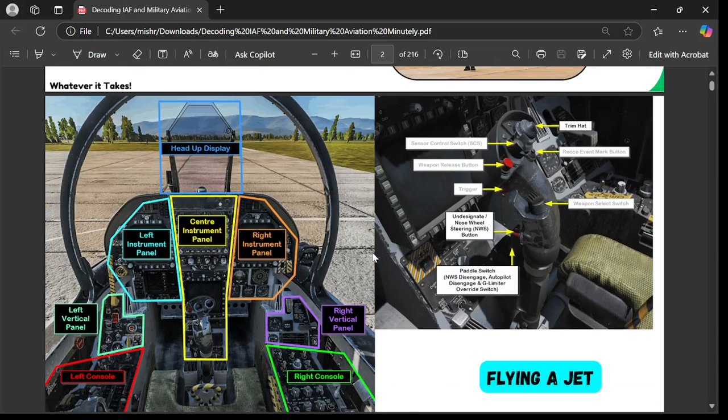So let me first take you through this tour of the slides which I have prepared, so that you get an overall idea of a lot of interesting things that we are going to discuss. Firstly, we'll be starting with the history, doctrine and roles of the IAF, terms in IAF. Let me first show you this particular slide where we'll be starting from the end, and then in a flashback format we'll go to the very start.

We'll start with, of course, flying a jet. I'll be taking you roughly through the procedure where you need to imagine that you are sitting in a fighter jet cockpit, right in front of you, and you can see these panels like right console, left console. You can see this joystick. Obviously I'll give you a rough idea how to use these control panels, how to basically start a fighter jet. Now you'll be surprised why I'm going to do all of this.

Obviously you have to first clear a written exam, then clear your interview, and then the medicals, and after that you get to fly a fighter jet. But I am starting it from backwards, right? Actually the point where you need to go. So just to give you a rough idea how it feels like starting a fighter jet, how it works, what are the buttons, what kind of demands and challenges are faced by a fighter pilot — not just in the way reels and short videos glamorize life in the Indian Air Force, and for that matter any other air force — but to actually understand the physical and mental caliber required to become a fighter pilot.

All right, all set, let us now start. See the control that you can see at the very starting is called a joystick, wherever my cursor is. For fighter jets, it's called HOTAS. We'll get back to that, but it's called HOTAS. This particular device that you can see right here.

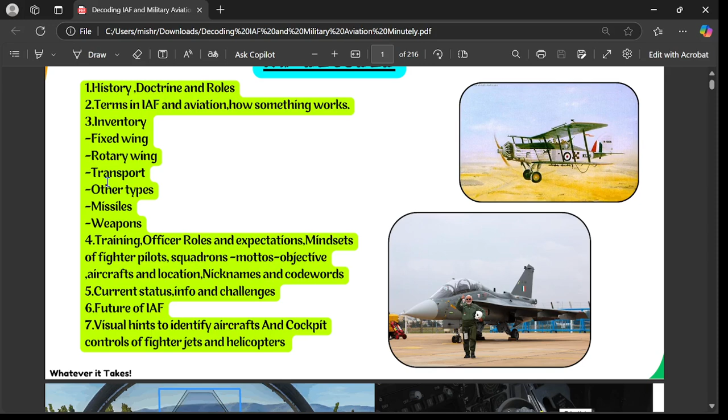And then the transport, then other types, missiles, weapons, training, officers' roles, current status, future of IAF, and visual hints to identify aircraft. The ranks in the Indian Air Force, just a glimpse. The commands and everything, the nicknames of the various squadrons, and the most awaited part, the various fighter jets.

If I just take a glimpse, just take you through this, the training procedures, and all of these things. And last but not the least is about the IAF's test pilot school. All right, so I hope you get an overview.

Let us start with the first thing first, which is how to fly a fighter jet, and then with the other things. Now let us start.

And this is all about listening. Imagine yourself as a pilot and you are sitting in this particular cockpit that you can see right in front of you. Are you there with me? Now, once you sit at this particular seat, these are the devices.

Get comfortable in that seat, wherever you are sitting, at a chair. Right in front of you is this joystick, and it's called HOTAS. Okay, let me write it.

HOTAS, which stands for hands-on throttle and stick, is the name for this complete setup. It has buttons to fire missiles and weapons, so you can fire right there in front of you.

Apart from this, this particular joystick can help you roll the aircraft. Listen carefully, you can roll the aircraft using this joystick. You can also change the pitch of the aircraft.

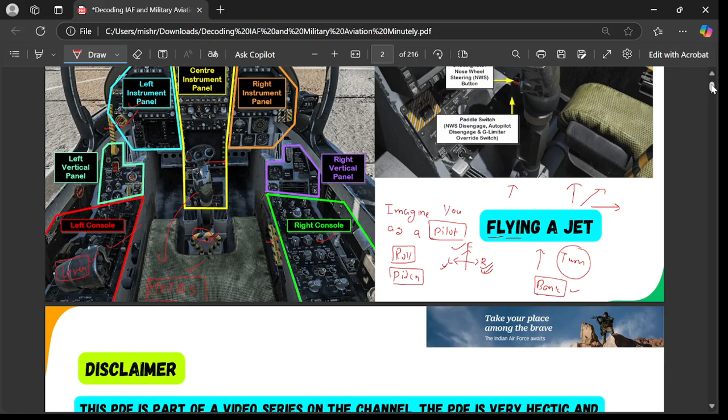We are not going to confuse you in that. Now let us focus on this hands-on throttle and stick, right? So the stick which you can see, if I focus on this, it has these buttons, let me show it to you.

Starting with this switch at the top, that is the sensor control switch. It basically controls all the sensors that are available, sensors detecting various things like the temperature in the cockpit and other parameters, the height, the humidity, all of these things.

Trim hat, this is one particular thing. The recce event mark button - recce means reconnaissance, right? Reconnaissance means when you go over an area and you survey the area for the purpose of some military intelligence gathering. So that is the recce event - you mark the event and the aircraft will note how much time it was doing the recce, taking the photographs. This red button is the weapon release button.

This is for the trigger. You also have some bullets, some bullet shots, to damage the other aircraft in close combat. For far away combats, you'll require to lock a missile, a beyond visual range missile or anything like that. But in a close combat, when your enemy is nearby, you'll be required to use a trigger. You can keep it pressed and it will fire ammunitions as per the given rate.

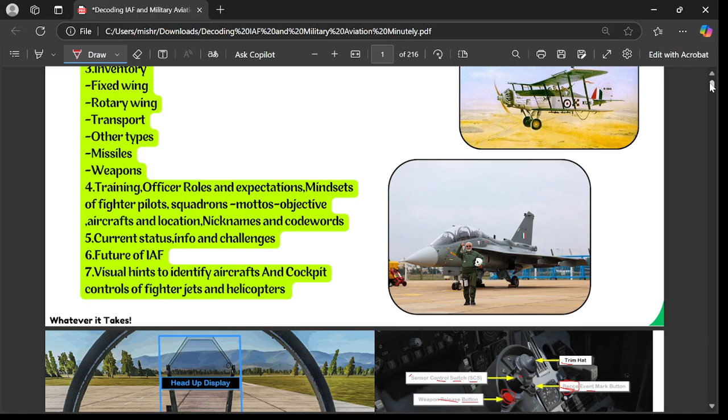So these are some buttons, just take an overall idea. During your training you'll have a detailed idea about how these things work, and at this stage you don't need that much detail, just an overall idea.

Now let us start with the left instrument panel. You already know the left instrument panel is at the upper side left corner, and at the downside is the left vertical panel. Remember that.

The whole instrument panel is subdivided into three parts: the left instrument panel, the center instrument panel, and the right instrument panel, right in front of your eyes. Below that is the vertical panel left and vertical panel right. Below that is the left console and right console. So: left vertical panel, right vertical panel, then left console, right console, and the head up display.

What is a HUD? This is the head up display, the display you saw right in front of you. Now this connects with an HMD. What is this HMD? HMD is a very special kind of helmet that pilots get, the helmet mounted display.

Imagine there is a screen right in front of you - let's say this is your heads up display. What is the role of this heads up display? It shows you a lot of information about the aircraft, like the altitude, the radar, the enemy locations, everything on this head up display. But this is fixed.

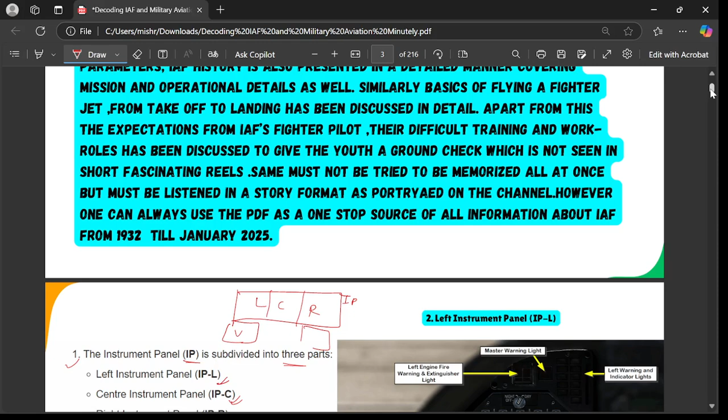Fighter jets fly with enormous speed, so time is a very important parameter here. HOTAS stands for hands on throttle and stick. The control stick is called HOTAS J and the throttle is called HOTAS T.

The stick is used to fly the plane. It is used to roll, to pitch the nose up, do maneuvers, and control the aircraft. But I didn't tell you about the turn yet.

Let me tell you about turning the aircraft. Turn is done by the rudder. What is a rudder? There are two pedals, similar to a bicycle, called rudder pedals. There is a left rudder pedal and a right rudder pedal. If you put the left rudder pedal, the aircraft will turn left. If the aircraft was going straight and you put the right rudder pedal, it will turn right. So this is the role of the control stick along with the weapons.

And what is HOTAS T? T is the throttle. It starts the engine and increases engine power, and it's also used to increase the speed of the aircraft. For example, if you inject more fuel using the throttle, more combustion will happen, producing more thrust. More fuel exits the back of the fighter jet's engine, pushing the air faster and with more force, giving more forward thrust and velocity. So the throttle basically controls your speed.

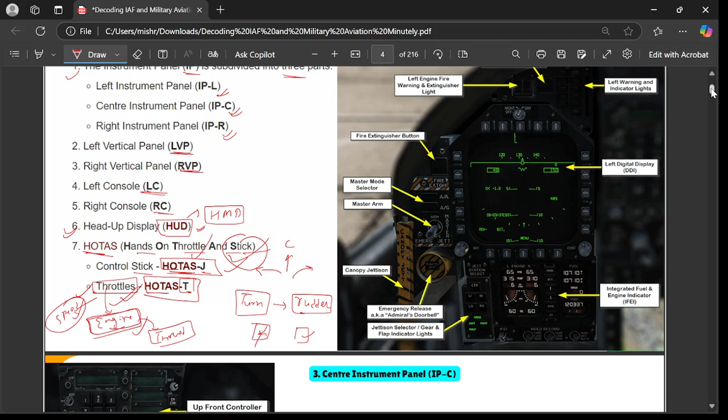Now let me take you through this instrument panel, your left instrument panel. Towards the upper left side, it contains some switches. Let's quickly dive through them.

First, at this stage is the master warning light. Close to that is the left engine fire warning and extinguisher light—if your left engine catches fire, this lights up. Then this is the fire extinguisher button. This is the master mode selector, and this is the master arm switch. Then there are left warning and indicator lights, and the left digital display—if there's any damage to the left side of the aircraft, it will be detected and shown here.

Moving downward, this is the canopy jettison. I already told you that whatever is painted yellow and black, do not touch it. If you press this canopy jettison button, the upper side of the canopy will blast away. It's used in emergencies, like when you're locked in and the canopy won't open due to fire. This is push to jettison—emergency release, also known as the Admiral's doorbell.

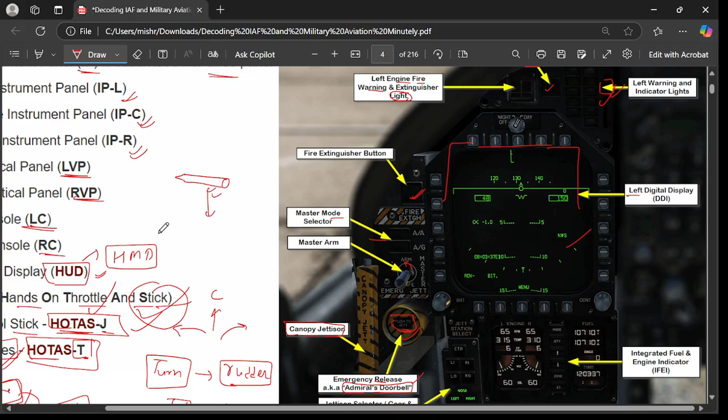If you push this jettison button, whatever extra fuel tank you're carrying gets released. Fighter jets carry fuel tanks that might look like a missile under the aircraft, but that's actually a fuel tank. This tank limits your ability because it's heavy with fuel—it's costly, though not as costly as missiles. So you can drop these fuel tanks to increase speed and gain agility during close combat. This jettison button is used for that, and it's called the Admiral's doorbell.

Next are the jettison selector, gear, and flap indicator lights, showing whatever gear you're in and your flap status. We'll discuss flaps later—they're part of the aircraft's wings, and when we talk about how a fighter jet flies, it'll be interesting to see the role flaps play in providing lift and making the aircraft fly. I was very curious to know how such a heavy machine can actually fly.

Elephants don't fly. Any heavy object doesn't fly, but fighter jets do fly. Being that heavy, how can they do so?

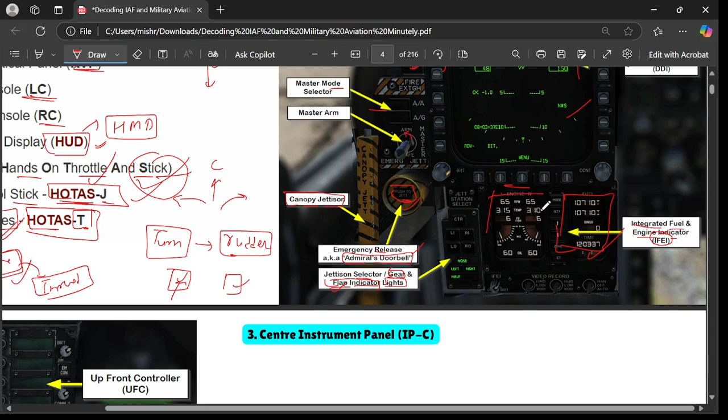Integrated fuel and engine indicator. These give you information about the engine, the fuel, similar to how it happens in your bike also, about how the engine is working, how many revolutions there are, rotations per minute, and what is the temperature of the engine. All this information is shown.

Let us move to the center instrument panel. Do you remember its location? You are in a fighter jet, you should remember, right? Right in front of your eyes, towards the left was the left instrument panel. At the upper side, in the center, is the center instrument panel.

It consists of the up front controller, or UFC. It has some radios, basically used to communicate with the air traffic control. You not only need to fly, but also need to be in constant communication. There are various radio and radar channels through which you can communicate with the air traffic controller, constantly sending your output, asking where to land, when to take off, all these things.

Heads up display and AOA indicator controls. These are the controls. You can see the BRT, brightness. There are some brightness adjusters and contrast adjusters, buttons to adjust the brightness of the heads up display. That is why there are a lot of buttons.

You can see the advanced multi-purpose color display here. This basically gives you information about the radar and map information. You can clearly see there is map information, giving you information about your targets and where to go. That is the advanced multi-purpose color display.

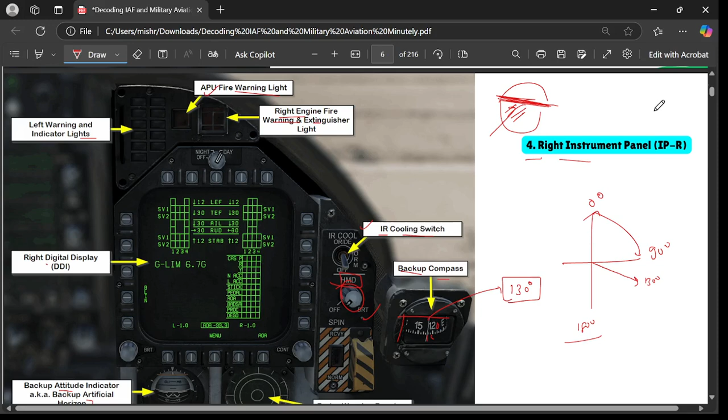Horizon means where the sky meets the earth. So this is the sky, this is the earth. You will be seeing a scene of the sky meeting the earth right in front of you, the horizon. With respect to that horizon, whether you are leveled, tilted left, tilted right, going down, or going up, all this information is shown, and it's important to know. So these are the pieces of the puzzle, these various instruments, minute instruments working together to make the overall picture a beautiful and good one, so that you can fly this beast machine.

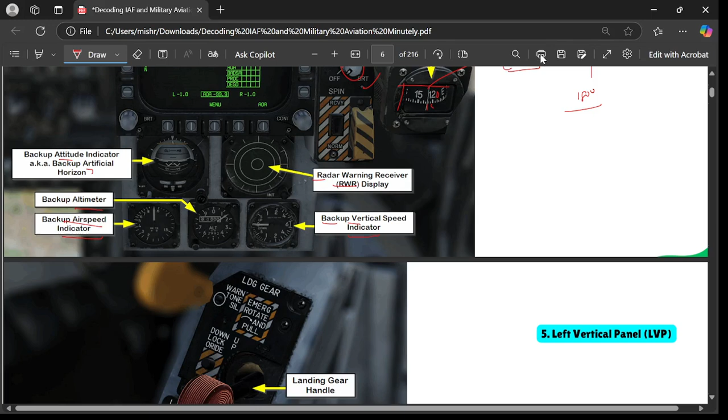Radar warning receiver display, backup vertical speed indicator, backup altimeter, backup airspeed indicator - all these are backups, in case your primary flight instruments fail to work because of some unforeseen reasons.

Now let us come to the left vertical panel. Where will you find it? Imagine the upper left corner was the left instrument panel. Close to below that is the left vertical panel. So you'll get these features.

Landing gear handle - so what is the landing gear? You have seen in the aircraft these wheels at the front side of the aircraft which are used during landing. So this is the landing gear handle.

This is the flap switch. If you put it to full, flap will be full. If you set it to half, it will be half. You can put it to auto also.

The selective jettison rotary switch button. This is the emergency switch - do not push this unless you are in emergency. Launch bar switch.

Landing taxi light switch - if you turn on this switch, they will turn on lights telling that you are about to land. Tail hook bypass switch.

Tail hook bypass switch means if you bypass this, the tail hook will bypass. There are some aircraft which require a tail hook method to land - they are basically landed by using a tail hook, a fly by wire system, as we say. So these fighters just fly by wire. Since the landing speed is so enormous, or the runway length is very less, then in that case we can use this tail hook method to stop the aircraft in time.

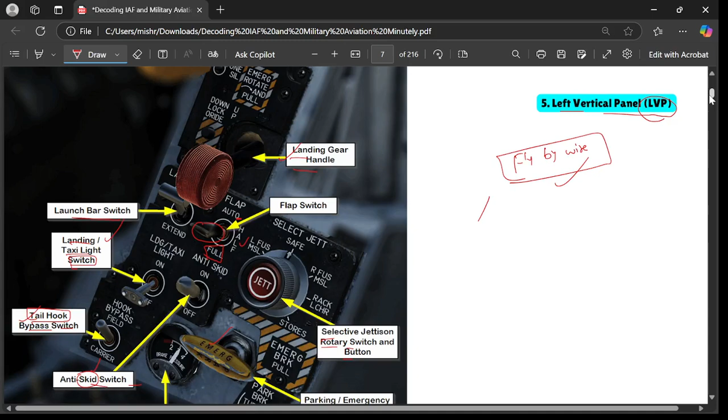And then there is a normal turn, which we will be seeing when we focus on the turn coordinator as a device. I hope you are aware of this. Don't worry, we'll be discussing about the flaps and all.

Now let us come down to the right vertical panel. You will see tail hook indicator light, tail hook lever - this is the tail hook lever. If you pull that lever, the tail hook will come out.

Wheels, flaps, hook, anti-skid harness, dispenser, wing folding lever - all of these are the levers. You can just pull it up or move it in a particular direction; a lever is just to move in a particular direction. Radar, altimeter - all of these things.

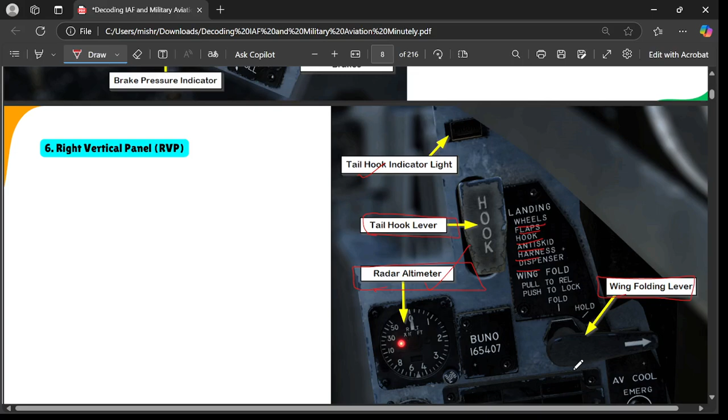Then hydraulic pressure, then right warning, flight control system, avionics cooling switch - so all this you will find at the right vertical panel.

Okay, now let us move to the left console. You are already aware of the position, right? Left console - so in the left console, you will get OBOGS.

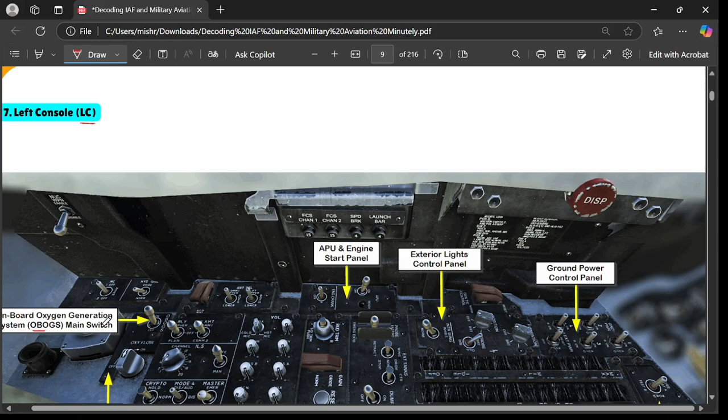Onboard oxygen generation system main switch. So this is the onboard oxygen generation system main switch, and then you can see a lot of switches - mode, master, APU and engine start panel.

APU is basically auxiliary power unit. In case your main power is gone, then your auxiliary power unit and engine will support for some time, and start panel - so this is the engine start panel right here. You'll press some switches here and there.

See, basically in a car, you don't just simply go and start the car. When you sit in a car, you actually put in the keys - when you turn it on, you put a particular switch, then the car turns on. Similarly in a bike, when you put in the keys, you press some buttons, adjust some buttons. So these are the buttons which make the engine ready. An engine is not like a bicycle - a fighter jet is not a bicycle, it needs to be slowly done.

This has been done step by step to protect the engine and do things in a gradual manner. This is for engine crank, the auxiliary power unit, you have to turn it on. After that comes the role of the throttle. You pull the throttle, and once you go to the throttle, the engine starts rotating, the blade starts rotating, it starts taking air through the intakes, and the fuel gets in. Then the blast happens, the engine starts, and you can move on.

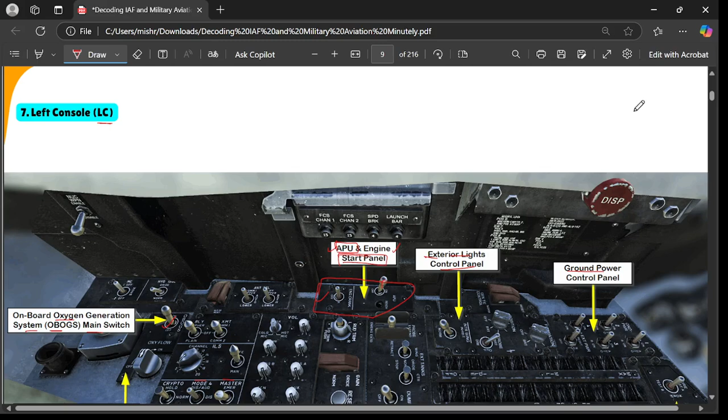Exterior lights and control panel, ground power control panel, right? Apart from this, this is the OBOGS dial. Now this is the volume control panel. This is the flight control system control panel. And then there are a lot of switches that you can see. Literally, when you go through your flight training with the Indian Air Force flying branch or anywhere, private or commercial flight training, you will be made to remember all these switches and their roles.

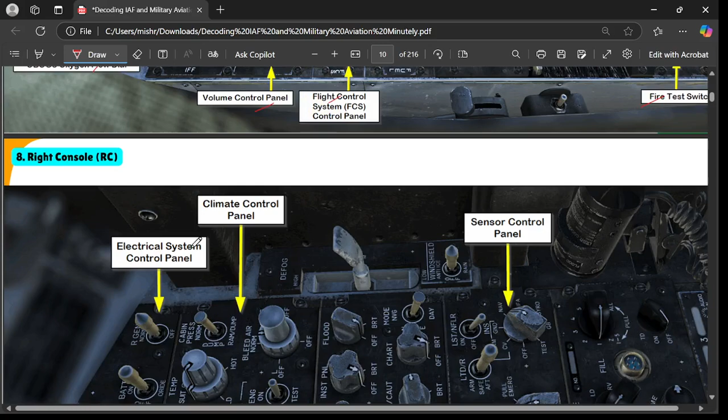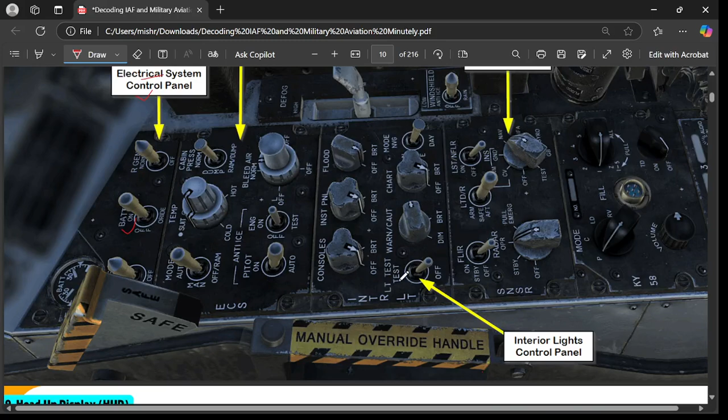Now the right console is the electrical system control panel. You can see the climate control panel. The electrical control system covers the battery, the lights, and the climate control panel. The sensor control panel lets you customize whatever sensors you want. These are the sensors. Manual override handle and interior lights control panel are also in the right console.

Now let us come to the head-up display. In the head-up display, all this information is shown. The same HMD is also available with your visor, your helmet mounted display. The helmet is a very cool helmet, I think one of the most cool helmets to wear.

First at the top, you will see a direction indicator or heading bug, which basically shows you the heading. In this display, every two entries is a gap of 10 degrees - 330, 340 - and this arrow shows your current heading, just before 335, so around 334 degrees. If you look at the direction coordinates, this is north, this is east, this is south, and this is west - so 90, 180, 270. 330 will be close to this direction, so you are heading northwest.

Now come down, and you'll get a vertical speed in feet per minute. What is this vertical speed? Imagine yourself in the aircraft - either it is climbing up or descending down. How will it climb up? You pull the throttle joystick a little backwards, so the aircraft climbs upwards, at some rate in feet per minute. This vertical speed indicator is showing 3960 feet per minute.

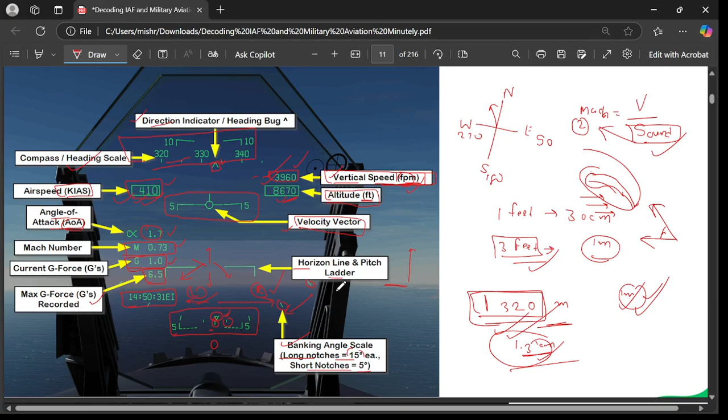Compass and heading scale, you already know. These are the information that you get through this banking angle scale - long notches, short notches. This is about the long notches you can see here, this is 15 degrees, and anything short is this much. If it goes towards a particular direction - it is in the center right here at this location, which is 0. So if it is going in this direction, it means right banking; if it is going in this direction, it means left banking. So it is not a tough job, right? You'll get acquainted with it very soon once you are doing the practice.

Now come to the control sticks. This is something you will be having your hands on throughout your entire span of flying the fighter jet. So, hands-on throttle and stick, you can say, a lot of switches. This is the thing fighter pilots do enjoy during a combat situation. Everybody who wants to become a fighter pilot dreams of a combat situation, real-life combat situation, or at least a dogfight simulation type of fight with our own friends.

Okay, so this is the instrument that you need to be focusing on. This is used to lock missiles on the other aircraft. This is used to trigger guns, to move the aircraft right, left, up, down. This is basically the most important part. So your hand-eye coordination will need to be very fast to use this particular thing, and there are a lot of things - your hand-eye coordination should be very fast, right?

Now, at this point, I want to ask you - what kind of activities, games, and other outdoor activities can you do to develop very fast hand-eye coordination?

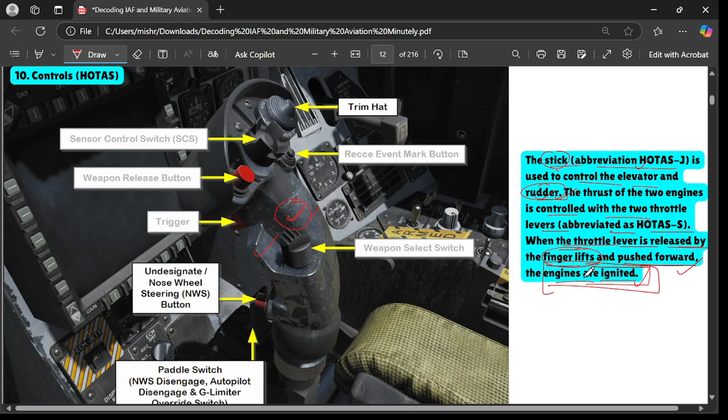When the throttle lever is released by the finger lifts and pushed forward, the engines are ignited. There's a finger lift stopping that. You pull it out from those finger lifts which stop the throttle, then pull it slightly outwards, forward. The engines will start, get fuel, and ignite. I hope you get some idea.

What is lever? Lever is different, throttle lever is different, and this stick is different. The throttle lever is somewhere else, towards the right side, left side that I showed you. And this stick is different.

This stick is used to roll, to go up, and you can also use it to turn. You can also use the rudder, as it says it can also be used to control the rudder. Although rudder pedals are also there, so you can do it using rudder pedals, or using your hand - you can turn and roll also using your hands.

And you can turn, because here it says control the elevator - an elevator which will control the pitch of the aircraft, and it is also used to control the rudder, which basically controls the turn of the aircraft.

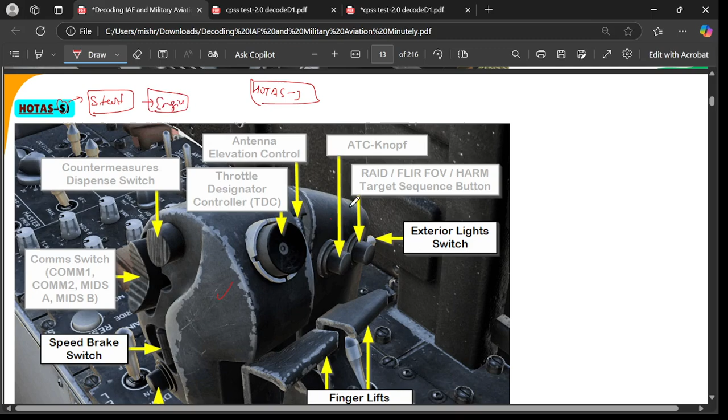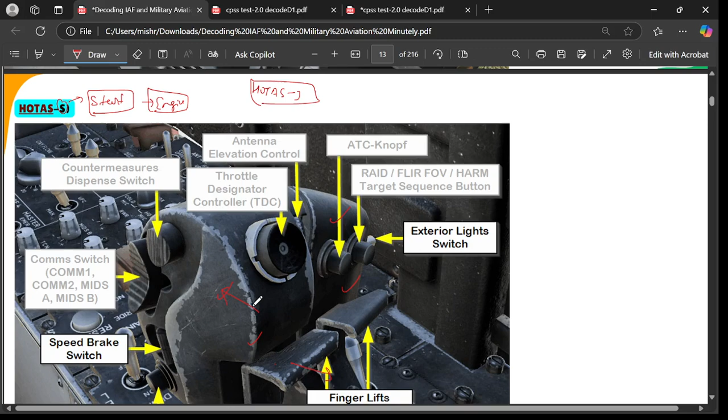This heavy device that you can see is the throttle lever, and this is the finger lift. It actually stops this from going forward. Now you pull this lift outward and move the throttle forward, which brings some fuel to the engine, and the engine starts. So I hope you are in a position to start a fighter jet.

But you cannot start a fighter jet till you have one. So, in order to start, let me summarize things. Go inside the fighter jet, look towards your left side or right side, the right console or left console. You will find some switches called the engine start button or the auxiliary power unit. Turn it on, and follow the due procedure of turning some other switches, a couple of them.

Afterwards, you just pull the finger lift from the throttle and push the throttle outward. What this will do is start the engine — the engine blades, called compressors, will start moving. Once you put the throttle outward to the idle position, it basically gives a very small amount of fuel just to ignite the fire. So the fire gets ignited, and the engine starts.

Now you move the throttle more forward, and you'll see the engine start crying a lot — it makes a lot of sound and pushes a lot of material outward. The rest is taken care of by Newton's third law. The material coming out from the back of the fighter jet pushes the air, and the air in return pushes the fighter jet forward. That is how the fighter jet moves forward.

Then what about lift? What about going into the air? So to go into the air, it is all about the role of the wings and the velocity. Let me explain it very briefly. Let's say these are the wings of the aircraft, and air is coming in this particular direction. Because of the shape of the aircraft, what happens is that towards the lower side — let me show you from another angle.

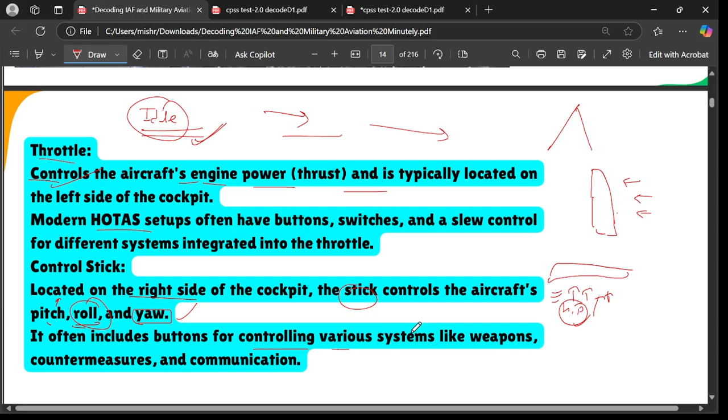So whether your aircraft is going up or down, it is controlled by the stick. Whether it is banking towards the left or right, or tilting towards the left or right, it is controlled by the stick. Whether it is turning, which is called yaw, it is also controlled by the sticks. And these buttons are for communication, right?

Really simple. Now you can just have a summary of all of these things. I have provided a summary. You can pause the video and just read through the summary.

What will happen if the engine start switch is located in the left instrument panel? It depends on aircraft to aircraft design. It might be located on the right instrument panel also, right? No hard and fast rule here.

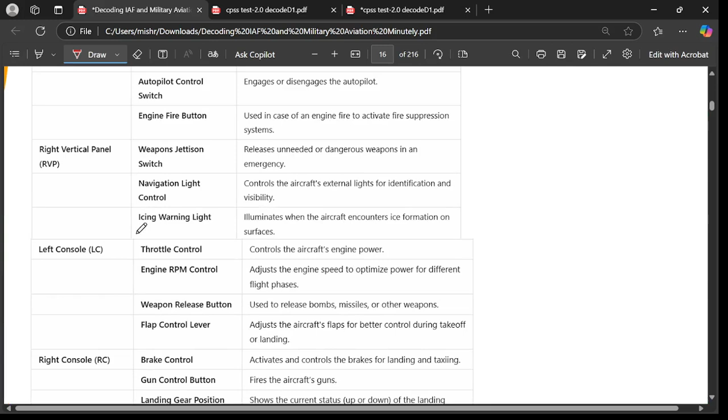Okay, then the fuel control switch, all of these things are given, so you can just have a look. I have already shown you, taken you through this, so I'm just sliding it over. Similarly, this is the left vertical panel with all of these controls.

Also given is the role, right? Weapon jettison switch releases unneeded or dangerous weapons in an emergency. Then there is the hydraulic pressure indicator.

So what is the role of the hydraulic pressure indicator? It shows the hydraulic pressure levels which control flight control surfaces like ailerons, elevators, and rudders. You need some amount of pressure because this is all a hydraulic system. It uses hydraulic principles, flow of air, fluid dynamics to move these parts like ailerons, elevators, and rudders. So this hydraulic pressure must not go down from a particular level. So this is the hydraulic pressure indicator.

This is the electric panel. Oxygen supply control monitors and adjusts the oxygen supply to the pilot. Fuel gauge displays the fuel level in the aircraft. Air data computer provides data on airspeed. Flight data recorder records the flight data for later analysis.

Weapons control panel selects and controls the deployment of weapons, bombs, missiles, etc. Radar control panel is just radar settings and modes. Primary flight display shows the essential flight information such as speed, altitude, heading, and attitude of the aircraft.

Landing gear lever. So basically at the very start of the aircraft, you will find two landing tires, two or three or a couple of them, right? It is used to raise or lower the landing gear.

Then there is the altitude warning light. It activates when the aircraft approaches an unsafe altitude. Okay, so basically this is the detail of where you will find this instrument.

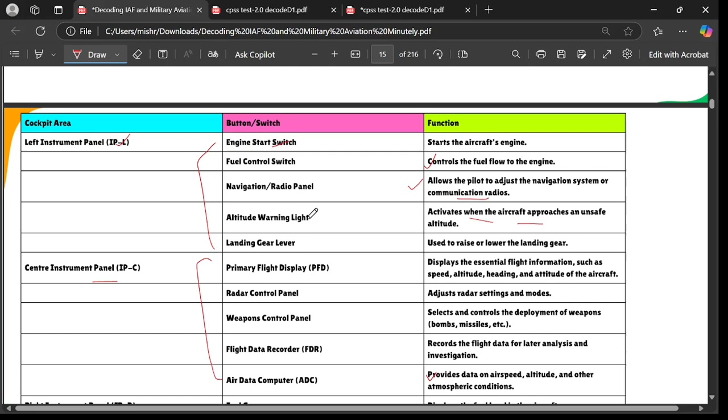Left vertical panel: emergency oxygen mask switch activates the emergency oxygen supply if needed. Autopilot control switch engages or disengages the autopilot. Engine fire button is used in case of an engine fire to activate fire suppression systems.

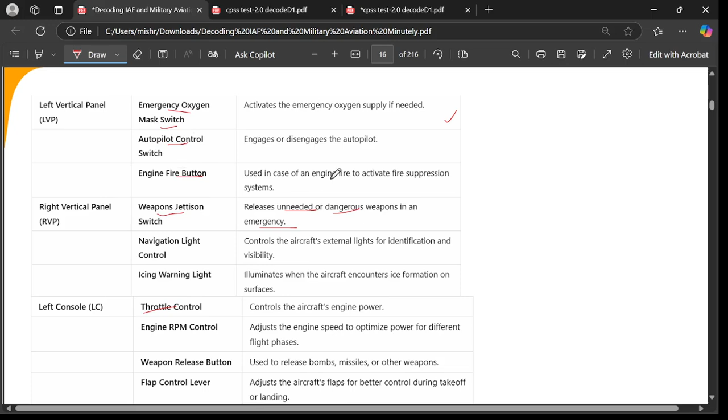Navigation light control controls the aircraft's external lights for identification and visibility. You need some lights also in a night setup. Icing warning light illuminates when the aircraft encounters ice formation on surfaces.

This is in the right vertical panel. Throttle control controls the aircraft's engine power. This is in the left console. Engine RPM control adjusts the engine speed to optimize power for different phases.

Weapons release button is used to release bombs, missiles, or other weapons. That is at the left. Flap control lever adjusts the aircraft flaps for better control during takeoff or landing. You can control it from the left console.

Right console: brake control activates and controls the brakes for landing and taxiing. Gun control button. Brake control activates and controls the brakes for landing and taxiing, because you need to also apply brakes and move in a particular fashion when you are taxiing towards the runway or moving towards the hangar.

Gun control button fires the aircraft guns. Landing gear position indicator shows the current status, up or down, of the landing gear. That is located in the right console.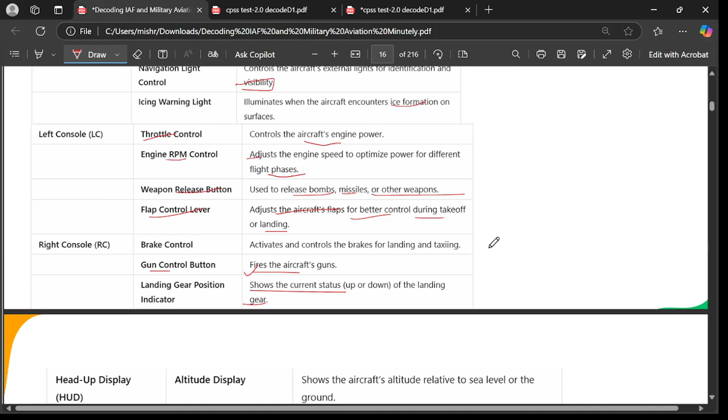Head-up display shows altitude display, speed display, and targeting crosshairs. So these are the target crosshairs, so you can locate your target. It displays aiming markers for targeting weapons or enemy aircraft.

So that is on the head-up display. Directly on your head-up display, there is the target, you can just lock it up and fire. Flight path vector shows the aircraft's current flight trajectory. So this flight path vector basically shows you the aircraft's current flight path trajectory, what path you're taking.

Hands on throttle and stick. It has throttle which controls the engine power, weapons release button, and countermeasure switches like flares or chaff. So what are these flares? You need to have some idea about the flares.

Flares are basically things we use to mislead the enemy's missiles. If there's a heat-seeking missile coming to attack your aircraft, you can engage them with flares, because flares are aluminum chaff foils which catch fire and reach very high temperature. Once an enemy missile comes near your aircraft, the flares will mislead and divert it, and the missile won't be able to decide whether it's hitting the flares or the aircraft. So this is a very good thing.

When you feel you got locked by an enemy, you can quickly deploy flares, make a sharp, fast turn, and escape using these countermeasures. So this helps in combat or dogfight.

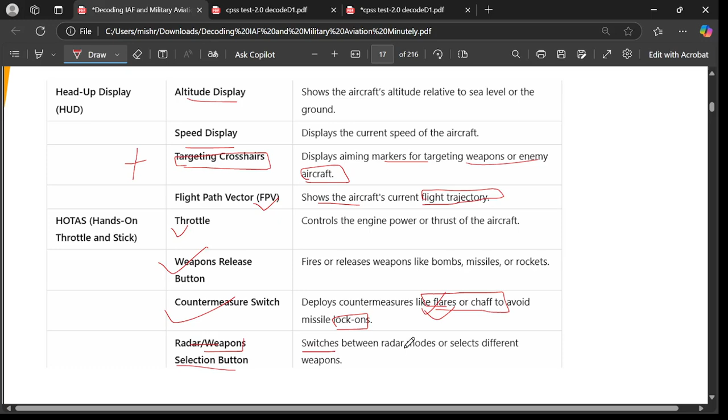The radar or weapons selection button switches between radar modes or selects different weapons. This is for radar. You can also fire BVR missiles, beyond visual range missiles. So what are beyond visual range missiles?

You might not be able to see your enemy through your eyes, but you can see his radar signature on your radar display. So you can fire a missile, lock on, and it will go through the radar signature of the other aircraft and hit the enemy. You don't need to be locking just by seeing. Gone are those days.

HOTAS-J is the trigger button, missile lock, launch, and flap control to control the aircraft flaps. You can also control throttle adjustment, missile launch button, speed control button, and altitude hold button there. So this is HOTAS-J and HOTAS-T.

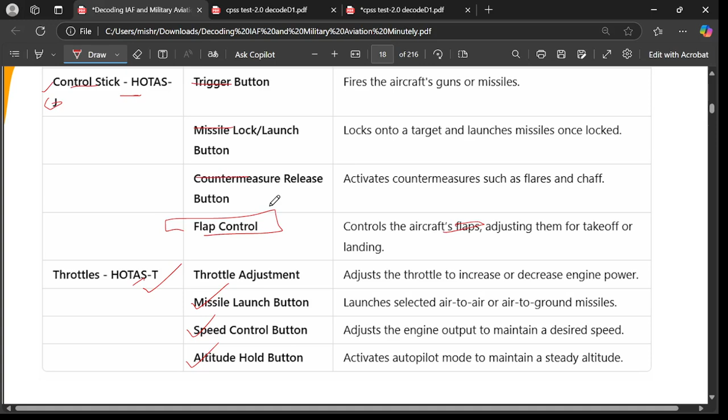J basically stands for joystick, T stands for throttle. Not to get confused, these sticks are just sticks. This one is used to either move the aircraft left, right, up, down, turn it, and fire missiles. The throttle stick is used to fire the engine, give it power, and increase the speed.

Turning the fighter jet left or right is done using the control stick, which is roll control. For a left turn, roll left by pushing the control stick to the left, and you turn towards the left wing. The left aileron moves up and the right aileron moves down. Let me show you the ailerons again.

So how do you turn using that? To turn left, you push the control stick to the left. Once you do that, the left aileron moves up. Here you can see the left aileron — this one moves up. Once it moves up, more air and pressure are on the upper side, so it tilts on the left side. Once it starts tilting left, it also starts turning.

Similarly, for a right turn, push the control stick towards the right. Once you do it, the right aileron moves up and the left aileron moves down, causing the aircraft to roll to the right. So this is for a roll.

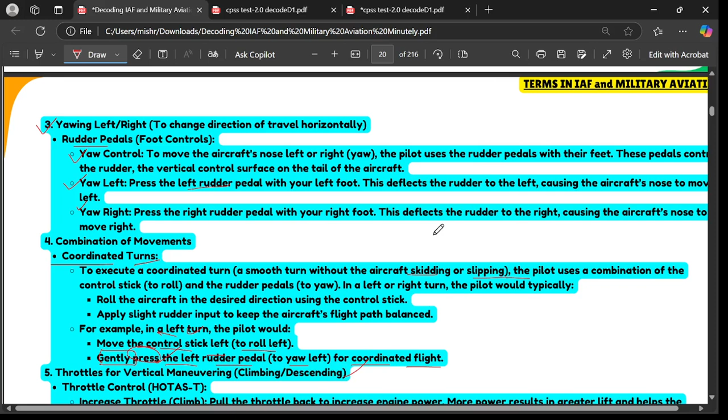Do not press the rudder pedal hard, because if you push it very hard, you will abruptly move, which is not possible and can damage your aircraft. These are very fine movements - you just need to slightly control the bank angles, and this can be very risky if not done with the correct procedure. That is why they give that much training. Think of those heavy fighter jets that do this, and for transport aircrafts like the C-130J Super Hercules, you need to be very fine with these movements.

For vertical maneuvering - climbing and descending - you increase throttle by pulling the throttle back to increase engine power. More power results in greater lift and helps the aircraft climb. If you decrease the throttle, pushing it forward, this lowers throttle, reduces lift, and causes the aircraft to descend. There is also some role of the flaps.

Flaps are used to increase lift and drag, mostly used during landing. When you deploy the flaps downwards on the wing, whatever air is coming from forward gets trapped downward. This increases the pressure at the lower side of the wing, and hence the aircraft goes up.

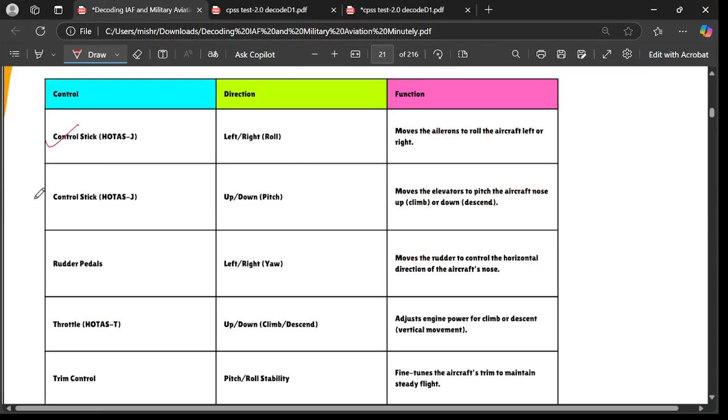Flaps have a role there. These are very simple things, and this is also a summary you can look at. Now there are some external features I've already told you about, like wing and ailerons, which I've already shown you.

Elevators. Wings are actually for roll and lift. Ailerons, as I already told you, are used to roll the aircraft to the left or right. Elevators are used to control the pitch, so the aircraft can go up, down, and you can increase throttle to increase airspeed going up or down. Rudder pedals are for turn and yaw control.

What is the role of slats? Slats are basically used for lift improvement, located on the leading edge of the wings. They extend forward to improve airflow over the wings at lower speed, enhancing lift and preventing stalls during low speed maneuvering, takeoff and landing. So they just go forward.

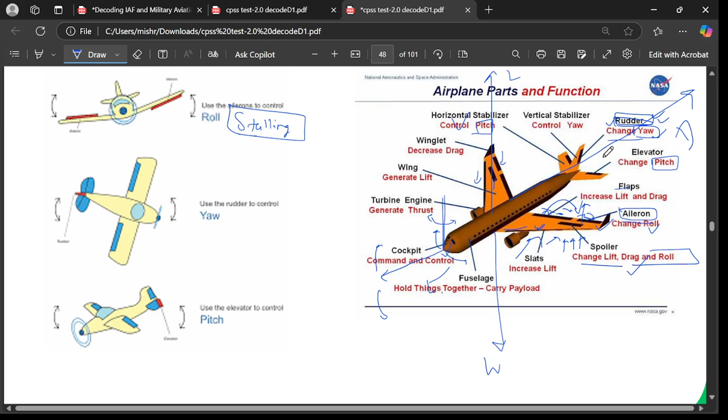The aircraft has some weight, so the weight always acts downwards. To counter that weight, the aircraft has to generate some lift, and lift acts upward. When the aircraft is moving in a forward direction, the drag force is acting backward - the air resistance is not allowing it to move forward. But the thrust that the engine produces acts in the forward direction and allows the aircraft to move forward. So these are the four fundamental forces: lift, weight, thrust, and drag, which help an aircraft fly.

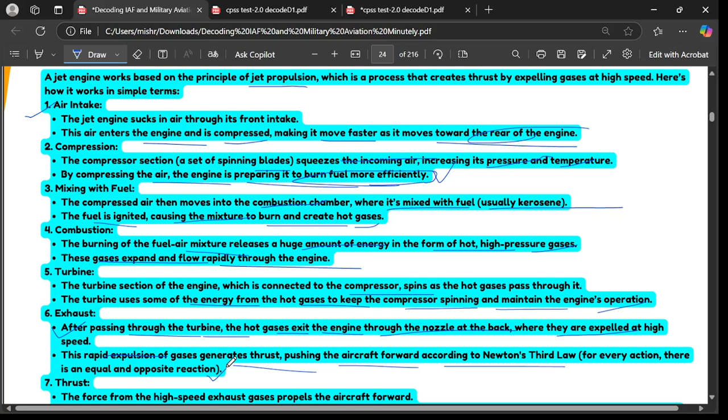So you see, it's all about the air - its compression, its burning with the fuel, and then the hot gases passing and moving the turbine. Some energy is used to again keep the compressor blades running, and then the hot gases are expelled outwards, causing thrust. So this is how it works.

Pre-flight preparation: before entering the cockpit, you have to check the weather. You have to read the pre-flight briefing. You should be aware of the weather conditions including wind speed, visibility, and cloud cover to ensure safe flying conditions. Because you are flying with instruments, you are not flying by looking outside the cockpit, so you have to be aware of all these flight parameters.

Get briefed about the flight route, objectives, and any potential threats. Review emergency procedures and landing plans. Personal gear: put on the flight suit, helmet, oxygen mask, and G-suit for protection during flight. Ensure that all personal gear is properly secured. Aircraft logs: review the maintenance logs and verify that the aircraft is in good operational condition.

Alright, so this is it, and I hope this gives you a fair amount of idea about flying an aircraft. Now what I will do is to quickly take you through these things in a written format. I will not read them. You can just pause the video or read it later at your own comfort.

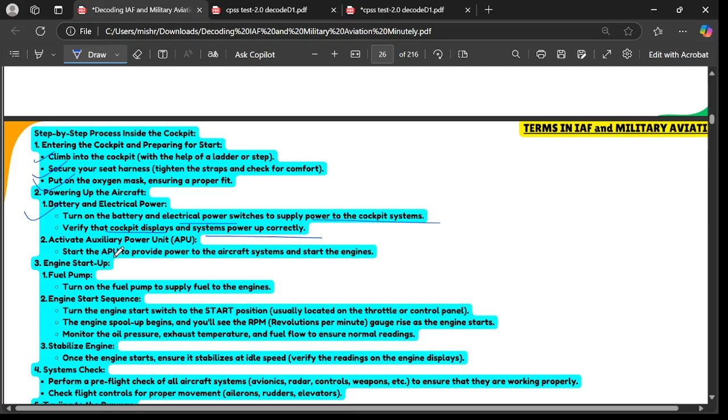This is the step-by-step process of starting an aircraft. Climbing the ladder, security, put on oxygen mask. Turn on the battery and electrical power switches to supply power to the cockpit system. Verify that cockpit displays and systems power up correctly. Activate the auxiliary power unit. Then the engine startup, engine start sequence.

Turn the engine start switch to the start position. You will see the RPM gauge rise as the engine starts. Monitor the oil pressure, stabilize the engine. Once the engine starts, ensure it stabilizes at idle speed. Verify the readings on the engine display. You have to stabilize the engine at a particular RPM value.

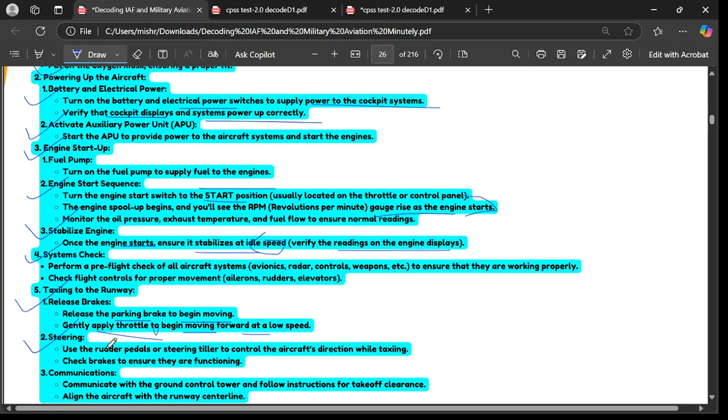System check, taxiing to the runway, steering. Release the parking brake to begin moving. Gently apply throttle to begin moving forward. You can apply throttle and gently move forward. You can use the rudder pedals to go here and there. So this is very easy.

You can do the communication, takeoff, climbing, right? Just have a look through this. This is the landing, throttle to full power. Alright.

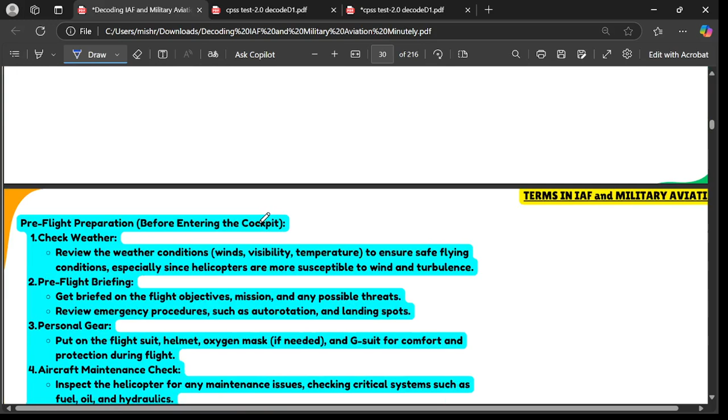And the same thing is given for your rotary blade devices also, right? For example, a helicopter. So this is for a helicopter. Let me show it to you.

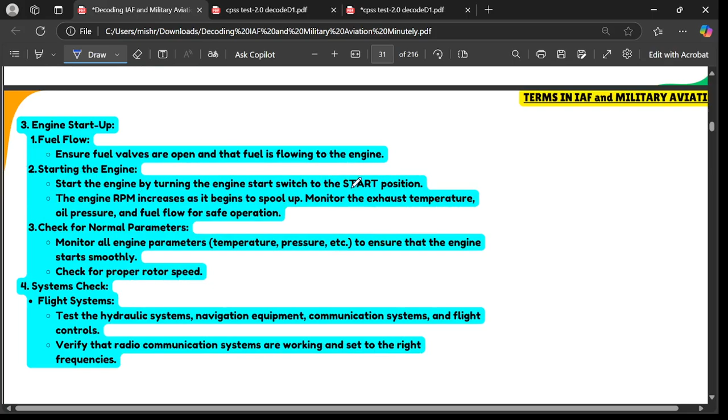You have to start the engine, check for normal flight operations, taxiing and hovering. Rotor management: engage main rotor, slowly increase throttle to engage the main rotor. Rotor and tail rotor. So hovering is a skill unique to helicopters. Use the collective to maintain altitude and the cyclic to keep the aircraft in a stable position. There is a device called collective in helicopters used to maintain altitude, and a device called cyclic used to keep the aircraft in a stable position.

Let me tell you that working with a helicopter is a very brilliant technique. It requires more effort than working with a fighter jet. You will be surprised because you cannot take your hands off the cyclic at any moment. You have to constantly be engaged with the helicopter. So this is a little tougher compared to the fixed-wing fighter jets.

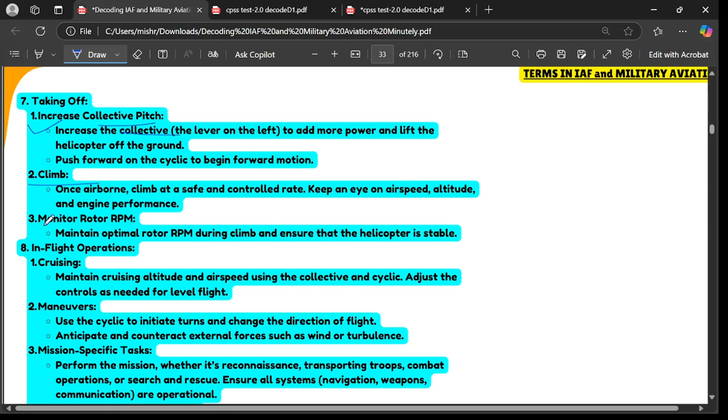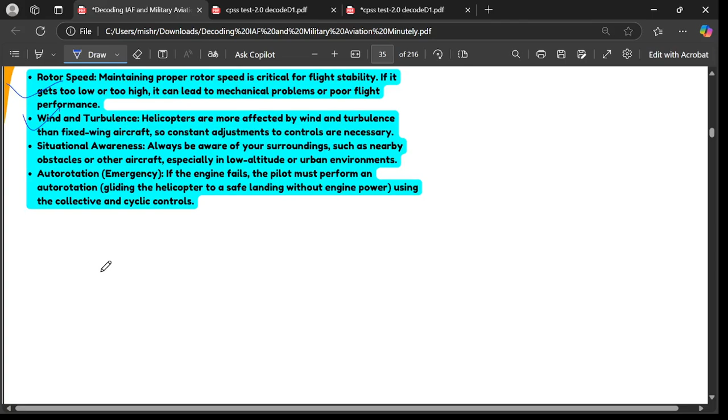So for taking off, increase collective pitch. Once airborne, climb at a safe rate. In-flight operations: maneuvers, mission-specific tasks, preparing for landing, maintaining rotor speed, all of these things. So I hope these things are clear.

Before we move any further, let me brief you about the working of a helicopter compared to a fighter jet. In a fighter jet, the thrust is generated by a jet engine. Air is sucked in by the forward air inlets, then it is compressed. After compression, fuel is injected and burns at a very high temperature, then it comes out of the nozzle, pushing the air backward in a massive explosion. Then everything is taken care of by Newton's third law: for every action there is an equal and opposite reaction.

So the explosive gases coming out from the back end of the aircraft push the air to one side, and the air pushes the aircraft forward. That is how fighter jets work. But what about helicopters? Helicopters don't have jet engines as powerful as fighter jets, so how do they fly? The idea is simple: helicopters have rotor blades that move at very high speed, and the movement of the rotor blades is controlled by a turboshaft engine. This engine is not as powerful as a fighter jet's, but powerful enough to move the rotor.

So now once the rotor blades rotate, it not only rotates to create a lift force, but also it can be adjusted or tilted up and down to generate a forward lift. So it not only creates a lift in the vertical direction, it also creates a lift in the horizontal direction. For example, let us say if you have a tilted kind of thing.

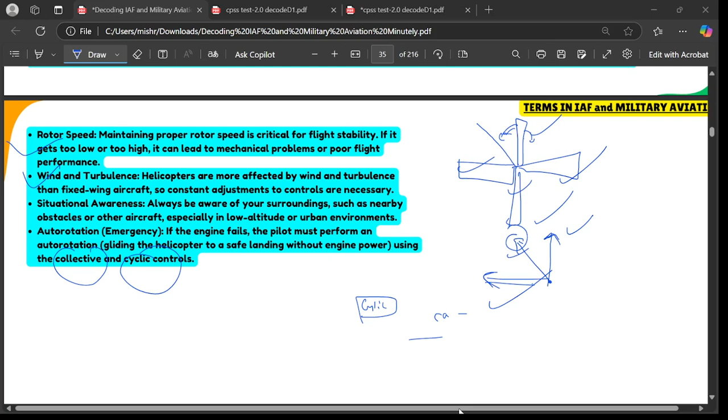And then the cyclic and the pedals are used to turn to the left or right, all of these things. So I've just given you a broad idea of how the helicopter is working. Just keep that thing in mind.

Now, finally, we'll be starting with the history of the Indian Air Force, this esteemed organization where people who are a cut above belong. So we'll be discussing this. But before that, we'll discuss some terms in the IAF which will give you a better idea. Let us say if I move forward and discuss something called a squadron, something called supersonic, something called ramjet, all of these things.

The cyclic, which is right in front of you, is controlled by your hands. You can move it forward, and the helicopter will start moving forward. You can move it backward, the helicopter will go backward. You can move it to the right, the helicopter will go right. You can move it to the left, the helicopter will go left. Apart from that, you can also control the pedals. For yaw or turning, it controls the yaw of the helicopter by adjusting the tail rotor thrust.

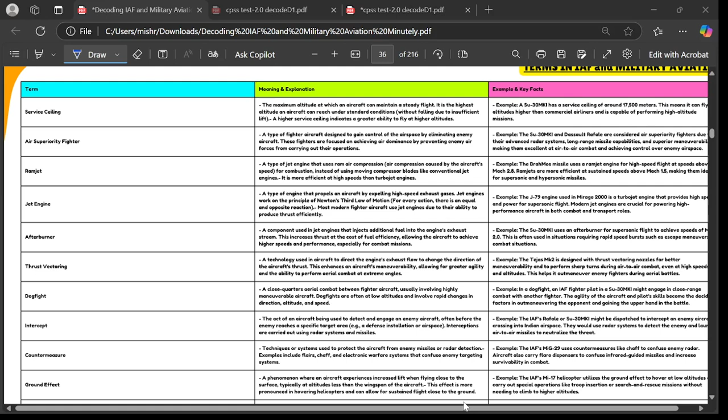Now the next topic that we are going to discuss is the terms - all of the terms like the service ceiling, the air superiority fighter, a ramjet, a jet engine, the afterburner, the thrust vectoring technology. All of these things that might be asked in your SSB interviews also, and you must be aware if you are willing to join as a fighter pilot, or you are particularly interested in aviation. So for these terms, I'll be giving you these slides, but let me just get you through the examples, because examples are the things through which you can learn them better.

So the first example is about the service ceiling. A Su-30 MKI has a service ceiling of around 17,500 meters. What does that mean? It means that it can fly at altitudes higher than commercial airliners and is capable of performing high altitude missions. So it can go up to 17,500 meters, close to 57,000 feet. That much height it can operate.

Similarly, the Su-30 MKI and the Dassault Rafale are considered air superiority fighters. Now, what is this air superiority fighter? It's basically, if you are in air, you have superiority over the enemy. Due to their advanced radar systems, long-range missile capabilities, and superior maneuverability, making them excellent at air-to-air combat and achieving control over enemy airspace. So if you are in a particular airspace, or in enemy airspace, you will dominate. Air superiority means I have some features in my aircraft with which I can dominate the enemy airspace - features like my mobility, my good maneuverability, my fast speed, my greater service range, fast maneuverability, thrust vector technology.

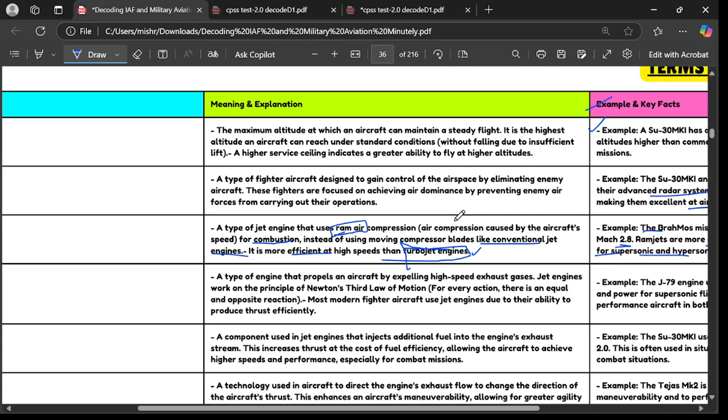Air compression caused by the aircraft speed is used for combustion. Instead of using moving compressor blades like conventional jet engines, it is more efficient at high speeds than turbojet engines. Since the air speed is already high, the air compression caused by the aircraft speed is used for combustion. That is a ramjet engine, basically using the high speed of the air for combustion.

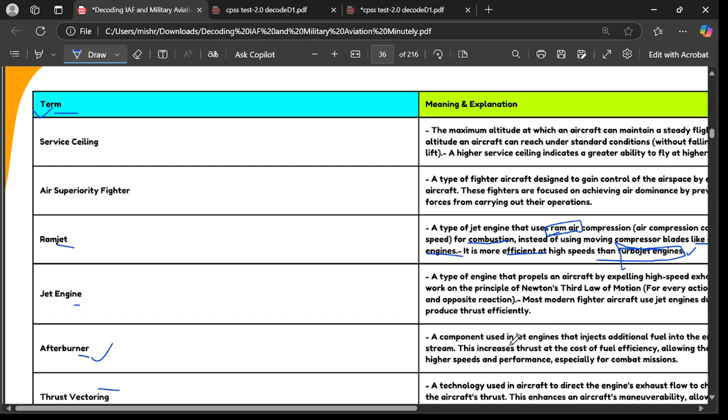The jet engine I have already discussed. Now, what is an afterburner? An afterburner is a component used in jet engines that injects additional fuel into the engine's exhaust stream. This increases thrust at the cost of fuel efficiency, allowing the aircraft to achieve higher speed and performance, especially for combat missions.

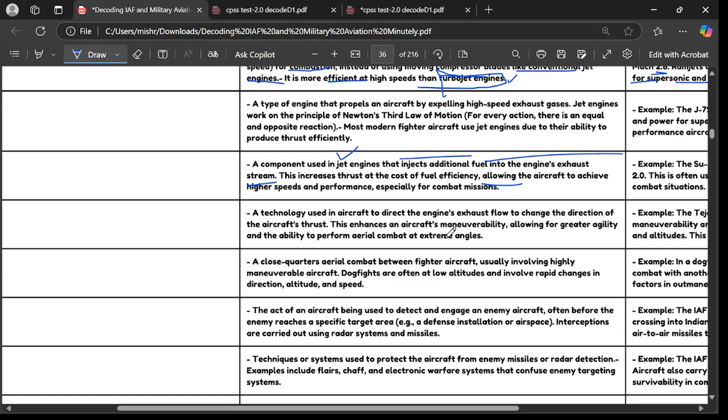Now, what is thrust vectoring? Thrust vectoring is used in aircraft to direct the engine's exhaust flow to change the direction of the aircraft's thrust. This enhances an aircraft's maneuverability, allowing for greater agility in performing aerial maneuvers.

The Su-30 MKI uses an afterburner for supersonic flight to achieve speeds of Mach 2. This is often used in situations requiring rapid speed bursts, such as escape maneuvers or combat situations. Tejas Mk2 is designed with thrust vectoring nozzles, and the Su-30 MKI also has this.

In a dogfight, an IAF Su-30 pilot might engage in close-range combat with another fighter. The agility of an aircraft and the pilot's skill become the deciding factors in maneuvering against the opponent and gaining the upper hand. So this is about the dogfight.

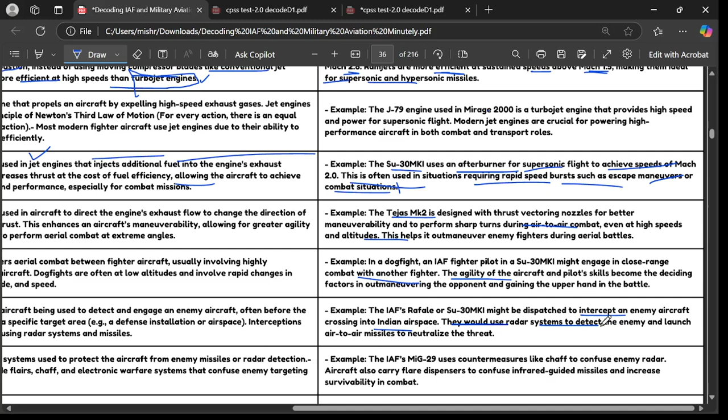Intercept - what is intercept? The IAF Rafale or Su-30 MKI might be dispatched to intercept an enemy aircraft crossing into Indian airspace. They would use radar systems to detect the enemy and launch air-to-air missiles to neutralize the threat. That is the interception role.

Countermeasures, you already know - flares and chaff are used. Flares, chaff, and electronic warfare systems protect the aircraft from enemy targeting, enemy missiles, and enemy weapons.

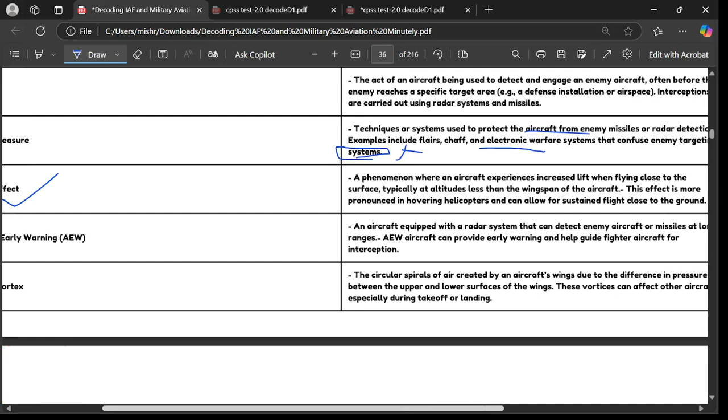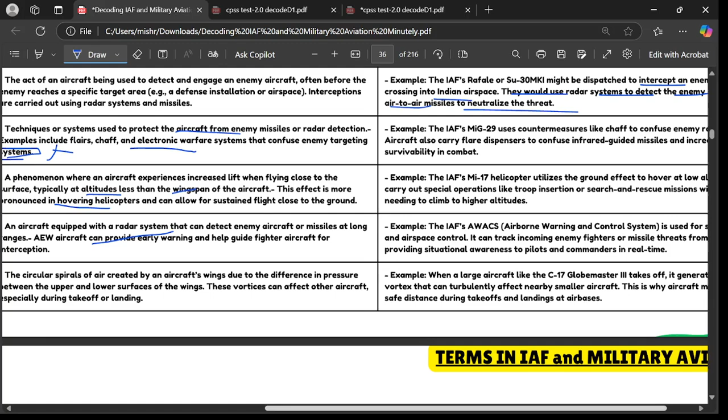Ground effect is a phenomenon where an aircraft experiences increased lift when flying close to the surface, typically at altitudes less than the wingspan of the aircraft. This effect is more pronounced in hovering helicopters and can allow for sustained flight close to the ground. For example, the IAF's Mi-17 helicopter utilizes the ground effect to hover at low altitudes.

Apart from this, what is AEW? Airborne Early Warning, and CS, and Control System. So AWACS, Airborne Warning and Control System, is used for surveillance and airspace control. It can track incoming enemy fighters or missile threats from far away, providing situational awareness to pilots and commanders in real time. Whoever is the commander, whoever is planning the overall mission, can analyze the data from the Airborne Early Warning and Control System, and then plan their move about a possible way of attack.

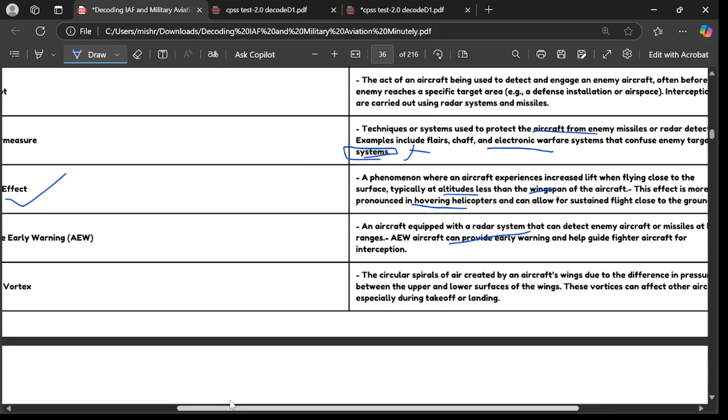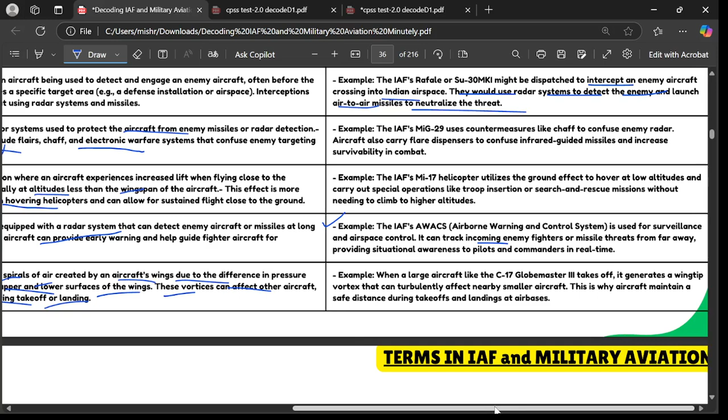Wingtip vortex, I have already told you - they are circular spirals of air created by an aircraft's wings due to the difference in pressure between the upper and lower surfaces of the wings. These vortices can affect other aircraft, especially during takeoff or landing. When a large aircraft like the C-17 takes off, it generates a wingtip vortex that can turbulently affect nearby smaller aircraft. This is why aircraft maintain a safe distance during takeoff and landing at airbases. Similarly, you must have some idea about the sonic boom also, because the sound pressure starts getting accumulated as you are flying close to the speed of sound.

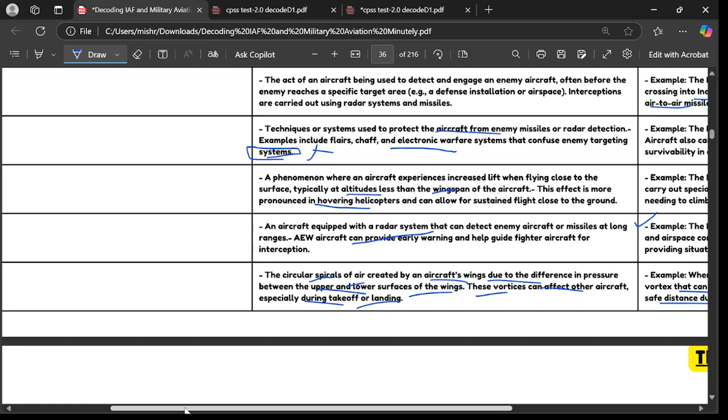Sound particles, the compression and rarefaction, start getting accumulated and don't get a chance to move. So when they get a chance to blast, you hear a supersonic boom. I'm just trying to put it in very simple terms.

Let me explain the supersonic boom. Fighter jets fly at very high speed, so if something flies, it also creates sound. But if you're flying less than the speed of sound, the particles are getting some time to move. The compression and rarefaction movement of the sound wave, or sound energy, get some time to settle down. But since you're moving very fast, you're actually creating a lot of sound waves, compression and rarefaction, and you've moved too fast, not allowing sound to travel.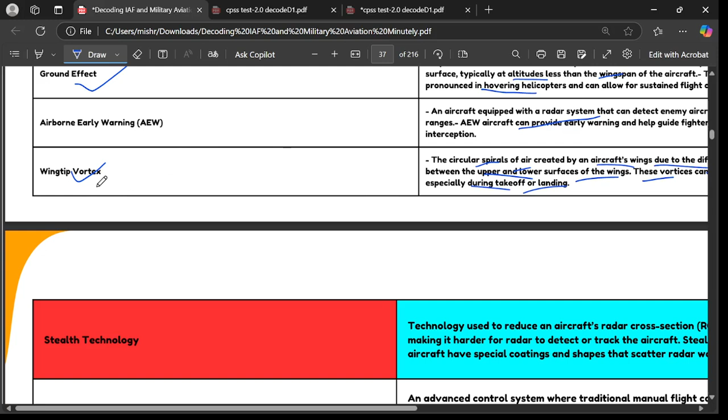You travel faster than sound, creating more sound waves. They start getting accumulated towards the later end of your wings or the jet, and then suddenly they blast and interact with each other. You hear a supersonic boom.

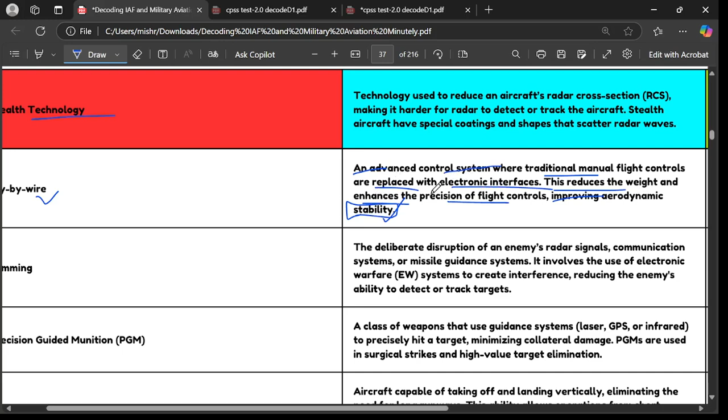Now, stealth technology is the ability of an aircraft to not be detected by enemy radars. What is fly-by-wire? Fly-by-wire means flying using wire, an advanced control system where traditional manual flight controls are replaced with electronic interfaces. This reduces the weight and enhances the precision of flight controls, improving aerodynamic stability. So it's basically shifting to digital things.

The Tejas LCA uses fly-by-wire technology that provides enhanced control and stability in high-speed combat scenarios, improving pilot feedback and making the aircraft more responsive.

Apart from this, Tejas also has an autopilot system. For example, it can fly without much interference and input from the pilot. This technology that Tejas has is known as autonomous flight technology.

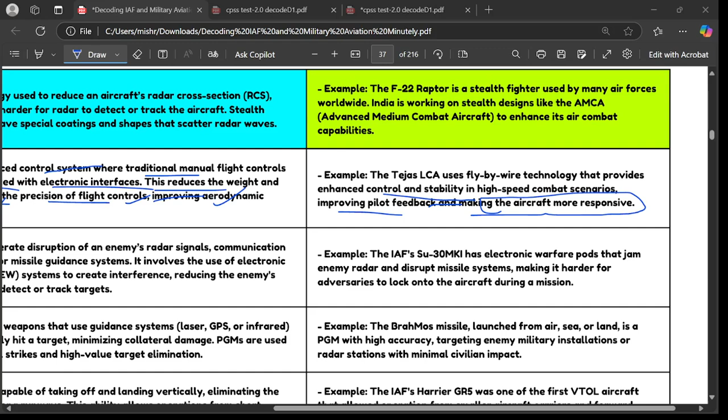Now, moving to the next thing: jamming. This is deliberate disruption of enemy radar signals, communication systems, or essential missile guidance systems. It involves the use of electronic warfare systems to create interference, reducing the enemy's ability to detect or track targets.

Imagine in a war situation, the enemy missiles are trying to lock you up, trying to get information about you. So if you jam the enemy's radar, they will not be able to detect you. This is electronic warfare. Or you can mislead their radars, giving them wrong signals about your position. So this is electronic warfare about jamming their radar systems.

Precision guided munition is a class of weapons that uses a guidance system. It uses laser, GPS, or infrared to precisely hit a target, minimizing collateral damage. PGMs are used in surgical strikes and for high-value target elimination, when you are strategically trying to hit something. For example, Israel is using a lot of PGMs, precision guided munitions, to kill their enemies.

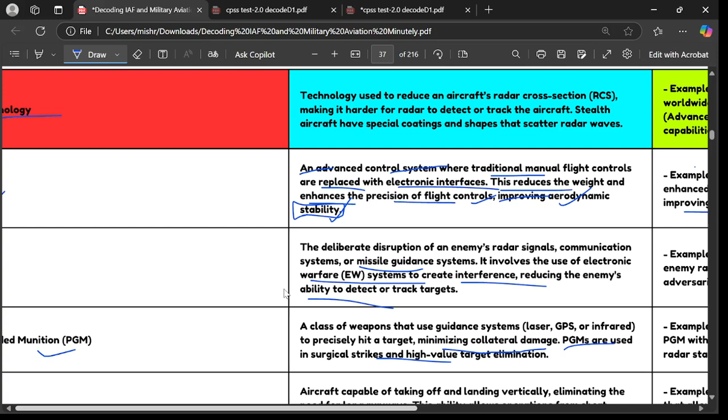Vertical takeoff and landing is an aircraft's capability of taking off and landing vertically, eliminating the need for long runways. I think the Harrier GR5 was one of the first VTOL aircraft. The Tejas Mk2 is also expected to incorporate VTOL. This will be a game changer.

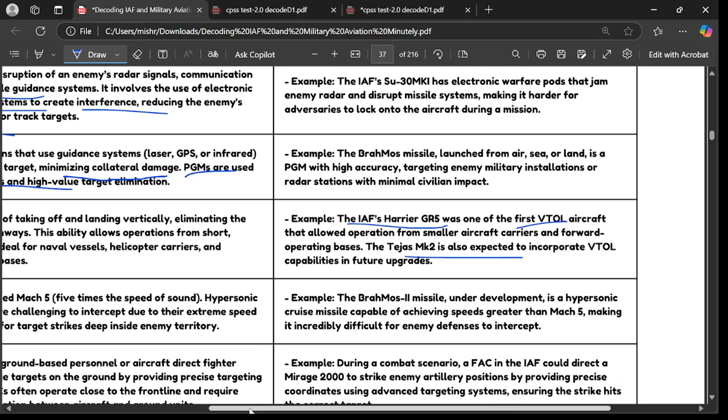Hypersonic - I've already asked you what is hypersonic. The speeds that exceed Mach 5, 5 times the speed of sound.

Forward air control is a mission where ground-based personnel or aircraft direct fighter aircraft to engage targets on the ground by providing precise targeting coordinates. FACs often operate close to the front line and require accurate coordination between aircraft and ground units. During a combat scenario, a forward air controller in the IAF could direct a Mirage 2000 to strike enemy artillery positions by providing precise coordinates using advanced targeting systems, ensuring the strike hits the correct target.

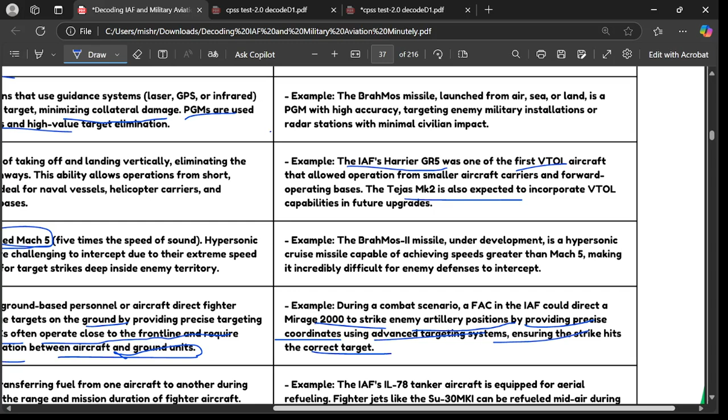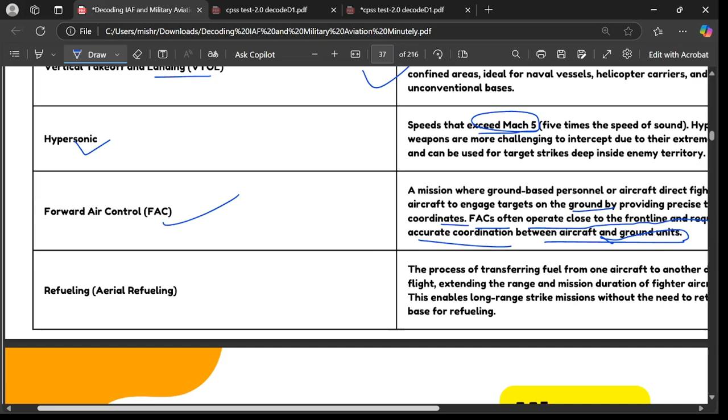So this is it about the FAC, the forward air control. Forward air control means anything on the front line border - a mission where ground-based personnel direct fighter aircraft to engage targets on the ground by providing precise targeting coordinates. So you can hit your enemy's ground targets at the forward post.

Refueling is air-to-air refueling, done by the IL-78 aircraft in the Indian Air Force. Sorry, the IL-76 is only for transport.

The IL-78 aircraft is a tanker aircraft equipped for aerial refueling. Fighter jets like the Su-30 MKI can be refueled mid-air during long-range missions.

All right, so this is it. Just before we start moving with the history of the Indian Air Force, I'll be telling you some surprising facts.

To fly a Su-30 MKI for 1 hour costs 5.5 lakh rupees per hour just for fuel. Similarly, flying a Rafale for 1 hour costs 4 lakh rupees. So you can calculate the money invested during training over, say, 2 years with 30 minute flights daily - it will clearly surmount to 1 or 2 crore rupees per person. And once you operate it in a real-time environment, it still costs 4 lakh per hour. So it's a lot of money going in.

The fuel we are using is JP8, jet propellant 8. I'll tell you the composition of this fuel. That amount is gigantic - a colossal sum is being spent, like 5 lakh literally an hour to fly a fighter jet like the Su-30. Now, why it costs so much is because of certain factors which I'll be discussing.

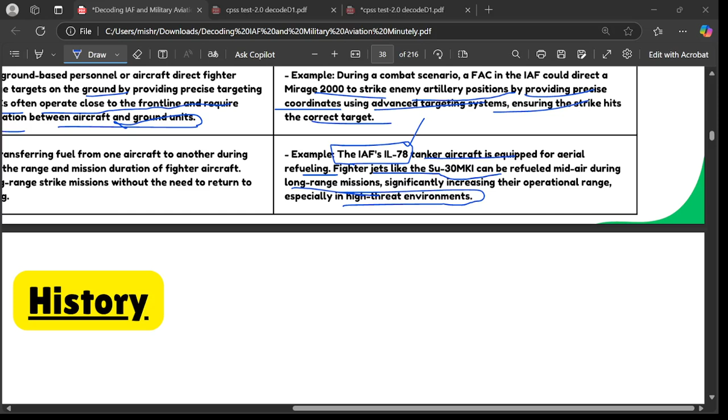All right, now is the time when the real game begins. I am going to take you on a journey - a journey where, you know the organization, but you should know the journey. You're going to belong to a very elite organization. People say, if you are a little tough, you belong to the army. If you are a little mentally fit, then you belong to the navy. But if you're both mentally robust and physically tough, then you belong to the air force.

So to be a cut above, it is very important that you go through this journey where things have started. Let me take you to 8th of October 1932. The IAF was officially established as an auxiliary air force of the British Royal Air Force. So earlier it was the British Royal Air Force, and we were an auxiliary unit or helping unit for them, established in India to support them. It started with a complement of 6 officers, 19 airmen, with its first aircraft being the Westland Wapiti biplanes.

This was something the British made for securing their interests in India, securing their missions in Myanmar, bombing in Myanmar, stopping the Japanese forces, and making us participate in the Second World War. With all these intentions, we were finally established on 8th of October 1932. But a time will come when we will drop the name Royal Indian Air Force, and we will emerge as the Indian Air Force.

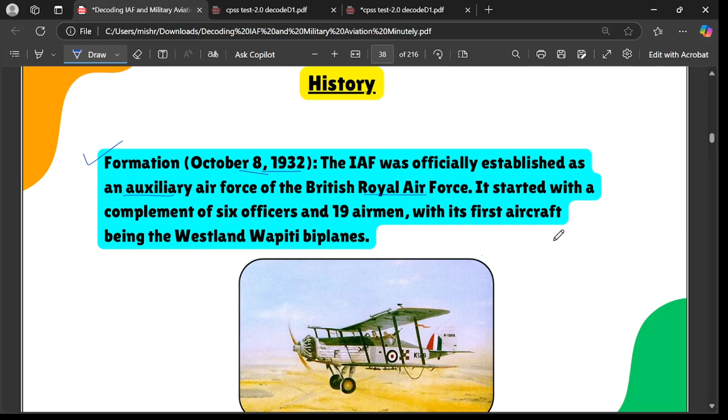Now, let me tell you in short about the Westland Wapiti plane and the role it used to play. Firstly, why was it called a biplane? It was called a biplane because you can see it had two wings, one at the top, one at the bottom.

That is why it was a biplane. You can clearly see some people sitting in there. One is flying, obviously, and another one is basically a weapon systems officer. It is handling a weapon and it is trying to hit other enemy aircraft that are coming.

So it was basically used for general purpose, for reconnaissance as a light bomber. The manufacturer was Westland Aircraft Limited in United Kingdom. It had its first flight on March 7th, 1927 and was inducted to IAF in 1933.

After that, a crew was already two, pilot and observer. Length is 35 feet, which is 10.67 meters. That is the length of the aircraft. Wingspan is 46 feet. Can you see it? Wings are more - if you compare the total length of the wings, it is more than the length of the aircraft itself. Height is 11 feet, that is the overall height of the aircraft.

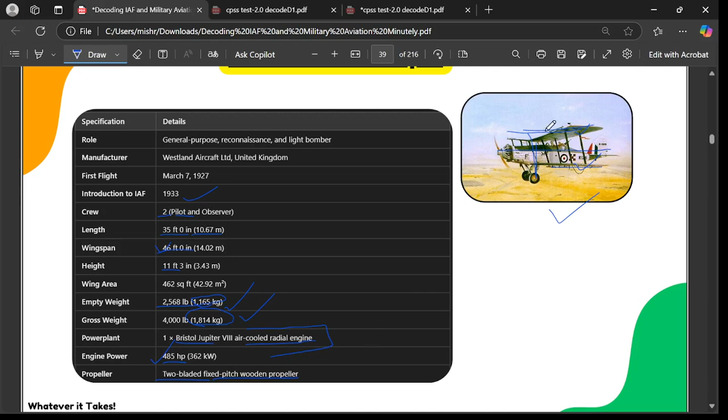Empty weight is 1165 kg. Gross weight is 1814 kg if loaded. Power plant is one Bristol Jupiter 8 air cooled radial engine - one in number. So engine power is 485 horsepower, propeller two bladed fixed pitch wooden propeller. You cannot do that much maneuver, but you can basically fly from a particular place to another particular place.

Now, once we have established on 8th of October 1932, and we have got these Westland Wapiti planes, it's all about the first squadron, the number one squadron. The first squadron was formed on April 1st, 1933. Number one squadron, the first squadron of the IAF, was formed in Karachi with four Westland Wapiti aircraft. You can see this Westland Wapiti aircraft, and it was established in Karachi.

Now comes, I'm taking you through chapters. It's like turning pages in the book of the IAF, what has happened, the important moments, everything in detail. So, history of the World War Second.

Now comes the World War Second. It was 1933. You remember the World War Second, 1941. World War II contribution, 1941 to 1945. The IAF actively participated in various operations during the World War II, including fighting against the Japanese in Burma. The force grew to 9 squadrons by the end of the war. The IAF received honors for its gallantry during the war, including a Distinguished Flying Cross for number one squadron.

Royal status was given in 1945. After World War II, the IAF was granted the prefix Royal by King George VI, given the kind of valor and commitment the pilots of the IAF showed during the war, becoming the Royal Indian Air Force. A Distinguished Flying Cross was also given at that time.

So all of this, the motto of the Royal Indian Air Force is per ardua ad astra. That was the motto, per ardua ad astra.

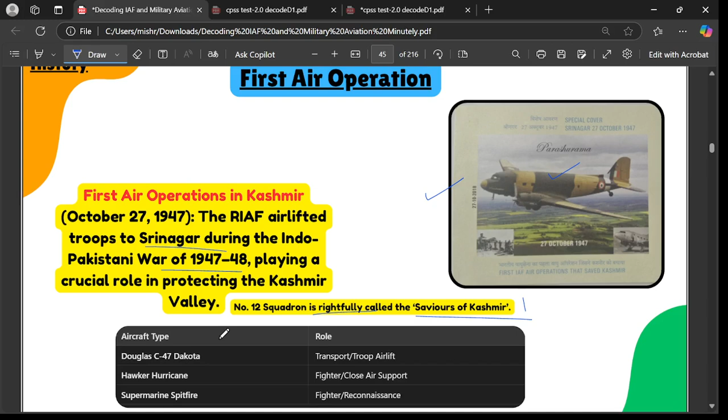Number 12 squadron is rightfully called the saviors of Kashmir. They are called Kashmir ke Rakshak, saviors of Kashmir. This was the Douglas C-47 Dakota, Hawker Hurricanes, Supermarine Spitfire.

Now, about this major air operation - number 12 squadron is rightfully called the saviors of Kashmir. Identify this person who flew that plane to Srinagar. This is obviously written - this is Royal Air Force, and he was the man who flew this aircraft. You need to let us know in the comment box who was this person who flew this plane to Srinagar.

Whatever this operation achieved has been given here in terms of operational details. The objective was to defend Srinagar and secure the Kashmir region. Start date was October 27, 1947. Key aircraft used were Douglas C-47 Dakota and Hawker Hurricane Spitfire. Primary mission was troop airlift, close air support and reconnaissance. Initial action was airlift of troops to Srinagar to prevent its fall to invaders. Key airbase was Safdarjung Airport in Delhi. Significant achievement was the first ever military airlift by IAF, with challenges including mountainous terrain, limited landing space and weather conditions. Outcome: secured key areas and helped prevent the fall of Srinagar.

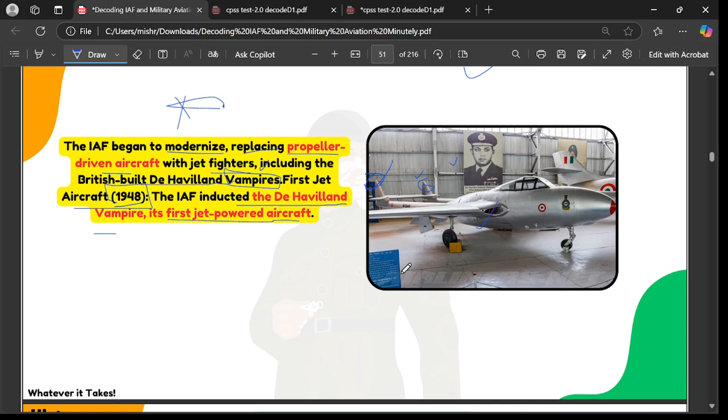In the back, you can see the photo of Air Marshal Subroto Mukherjee. We'll discuss about him.

Now coming to the next portion, which is the India-China War. So if you talk about the India-China War of 1962.

The Chinese border conflict in 1962 - the IAF provided logistical support during the Sino-Indian War, though it did not engage in combat due to government constraints.

It provided logistical support because at that time Pandit Nehru was very much into peace. He was of the opinion that China will not attack, and he was trying to portray himself as someone who was a pioneer in establishing peace in the region. So that obsession with peace, and neglecting and ignoring China's real intentions, led the IAF to not take active involvement, because it wanted to follow the government's orders.